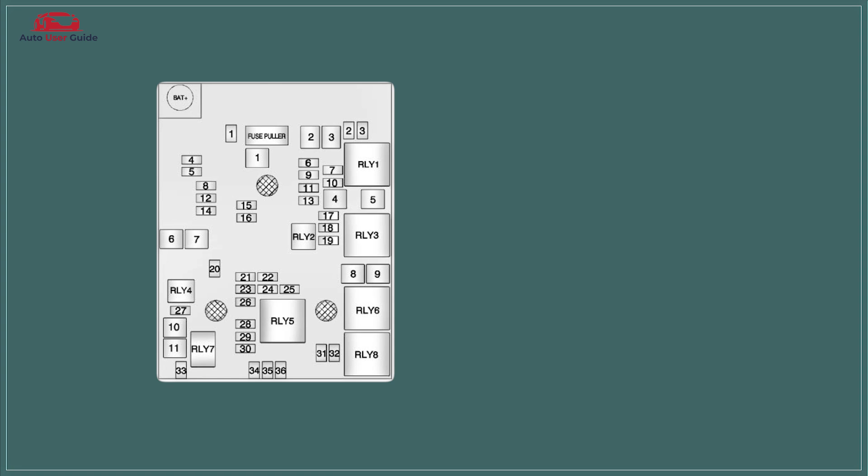Engine compartment fuse box. The engine compartment fuse box distributes and safeguards electrical power for essential engine-related systems, such as the ECU, ignition, fuel pump, cooling fans, and emission controls. It uses high-amperage fuses and relays to ensure safe, efficient operation of critical components under the hood.

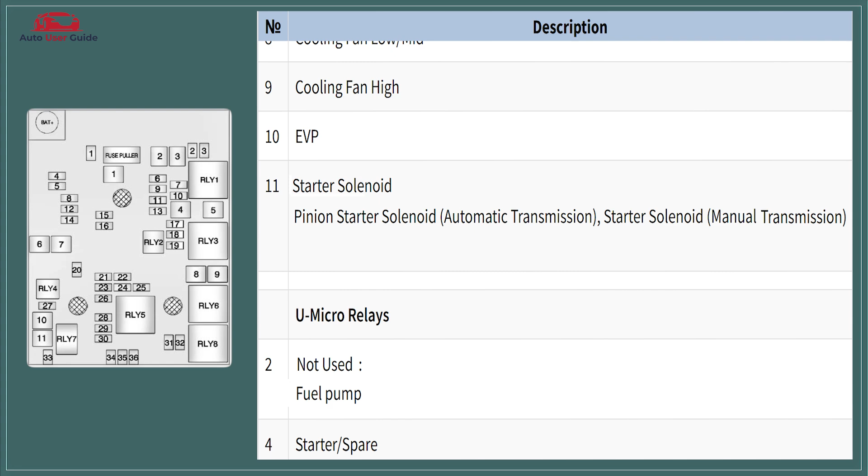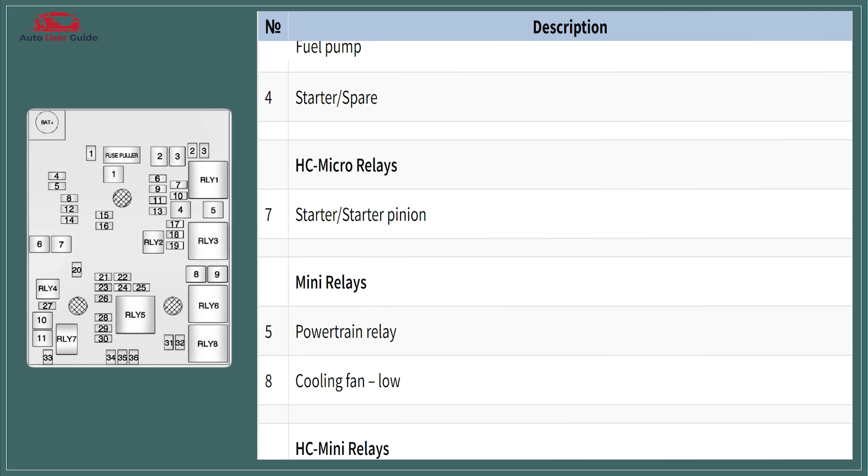Auxiliary fuse box. The auxiliary fuse box supplies and protects power to optional systems like trailer wiring, additional lighting, or aftermarket accessories.

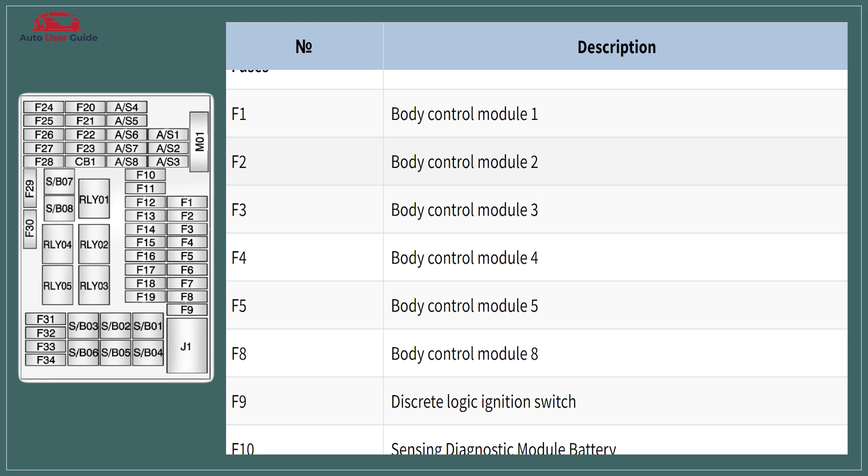Instrument panel fuse box. The instrument panel displays vital driving information such as speed, fuel level, warning lights, and engine status directly in the driver's line of sight. It helps the driver monitor vehicle performance and alerts in real time for safe and informed driving.

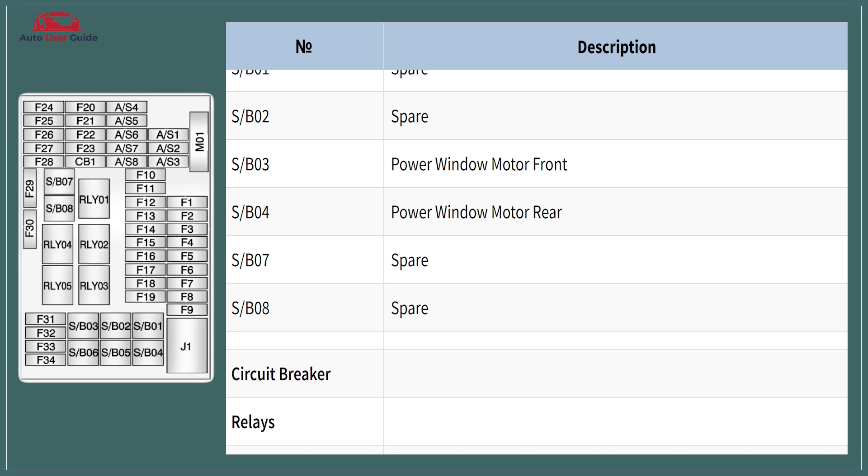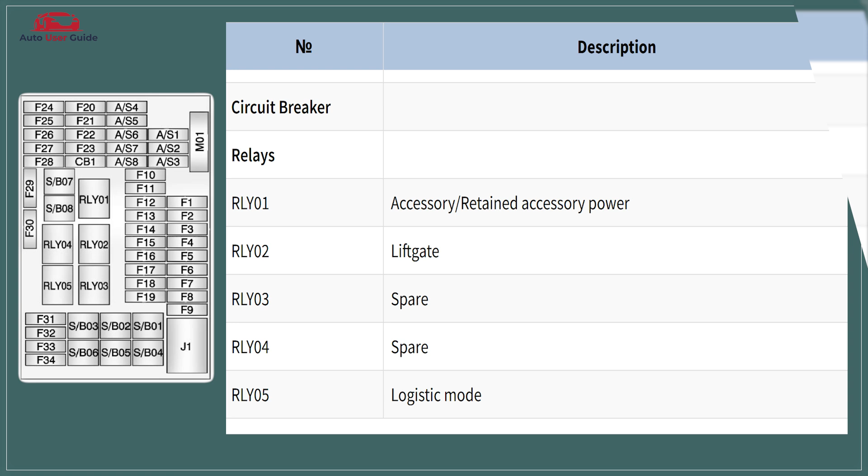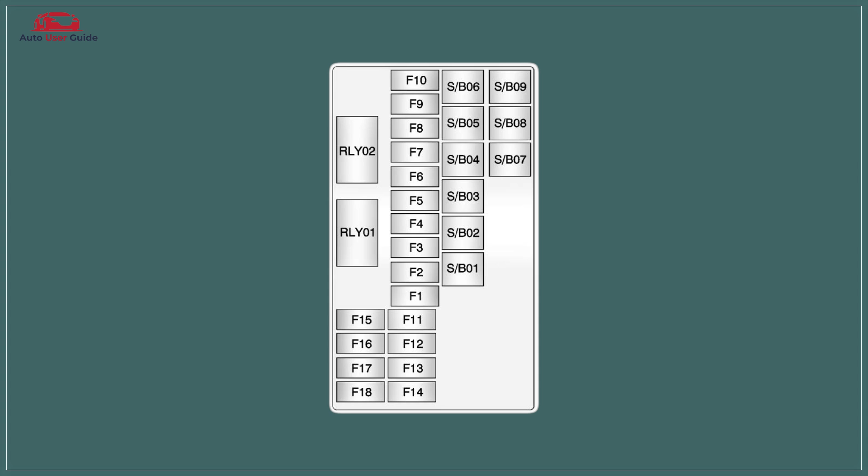Rear compartment fuse box. The rear compartment fuse box manages and protects power distribution to rear area systems such as tail lamps, rear wipers, trailer connections, and power liftgate. It ensures these components operate safely and efficiently by preventing electrical overloads and short circuits.

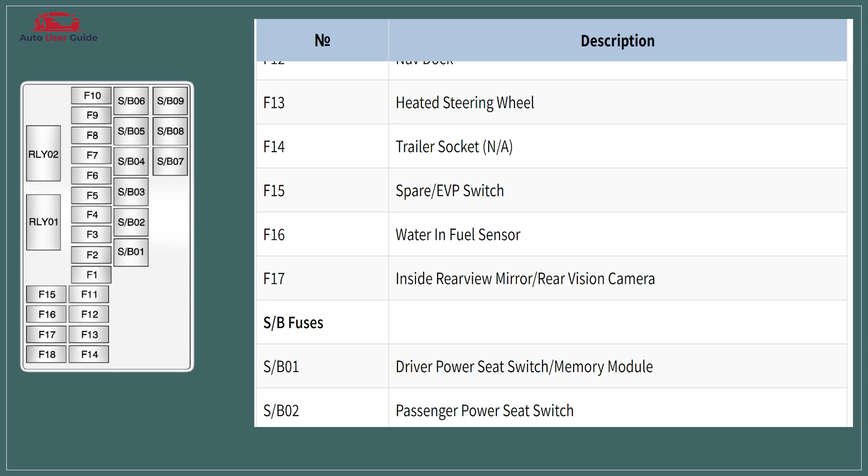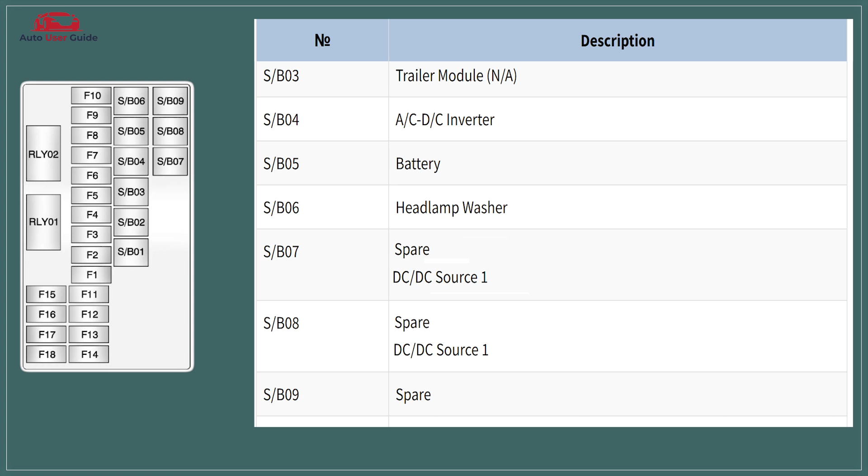Types of fuses: blade fuse, standard blade fuse, mini blade fuse, maxi blade fuse, micro 2 fuse, micro 3 fuse, J-case fuse.

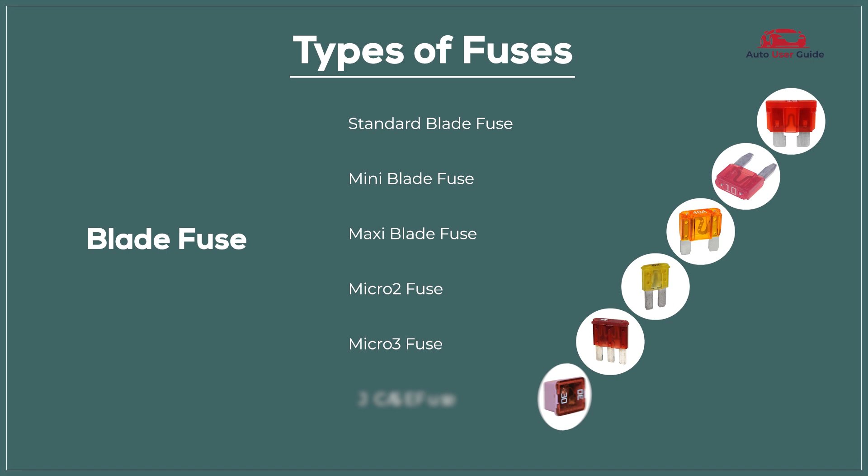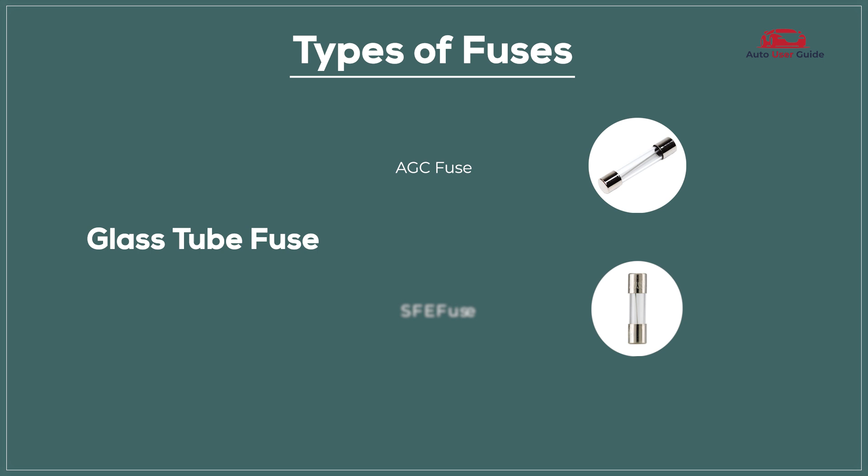Glass tube fuse, AGC fuse, SFE fuse. Ceramic fuse, Bosch fuse, DIN fuse.

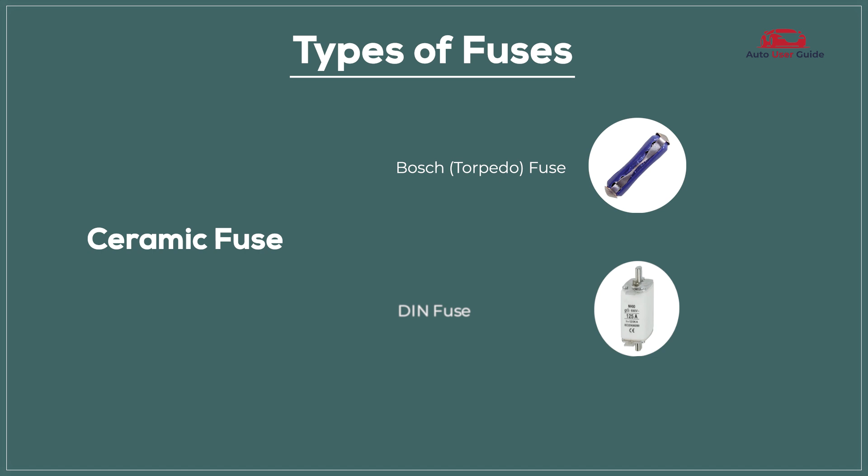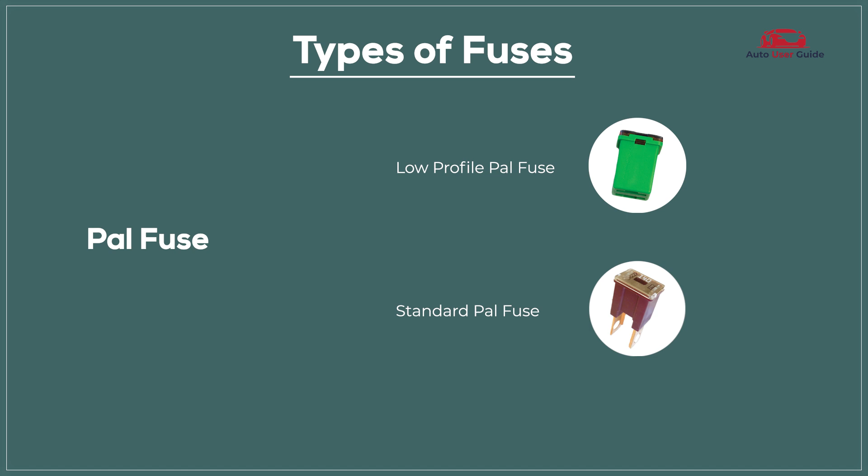PAL fuse, low profile fuse, standard PAL fuse. Link fuse, mega fuse, high amperage link fuse.

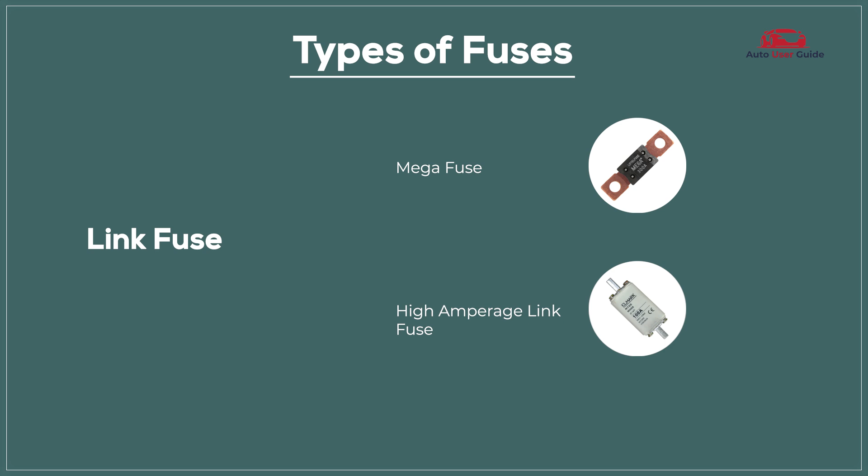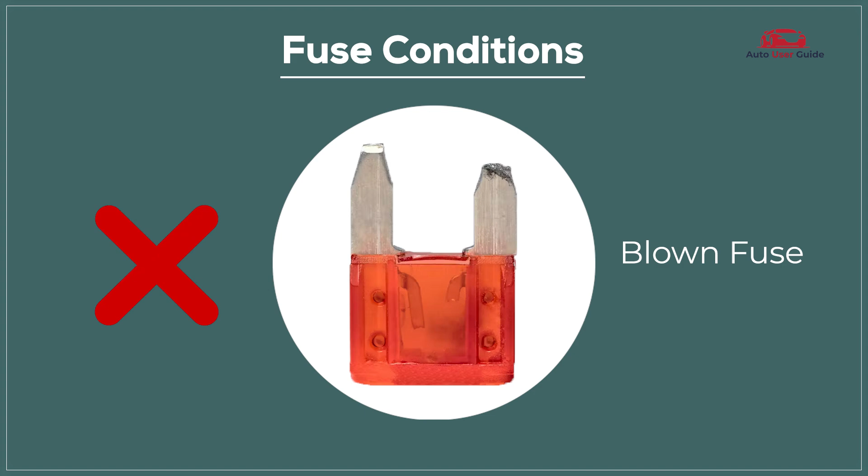Fuse conditions: blown fuse. A blown fuse means it's no longer functioning and needs replacement, while a perfect fuse is in good working condition and performing as expected.

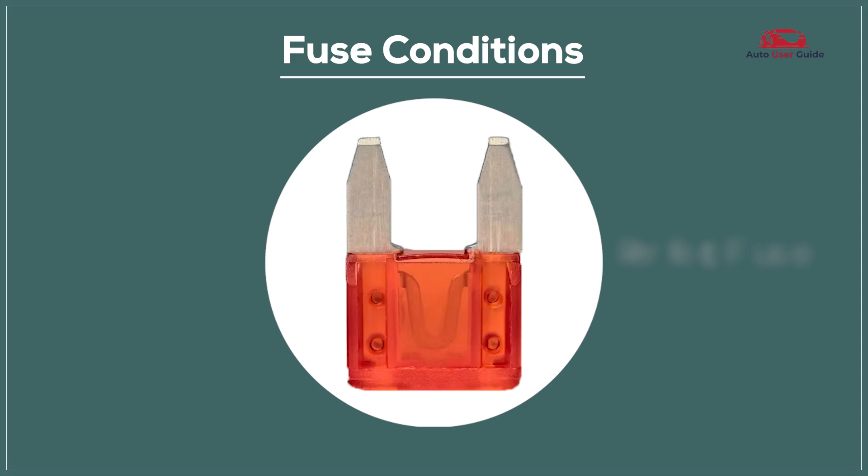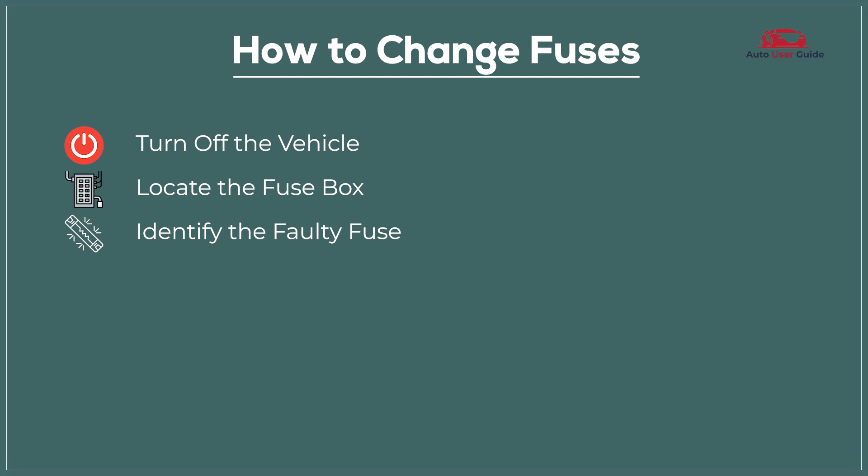How to change fuses: turn off the vehicle, locate the fuse box, identify the faulty fuse, remove the faulty fuse, inspect and obtain a replacement, install the new fuse, test the replacement.

Safety precautions: disconnect the battery, wear protective gear, use proper tools, check for correct amperage, avoid water exposure.